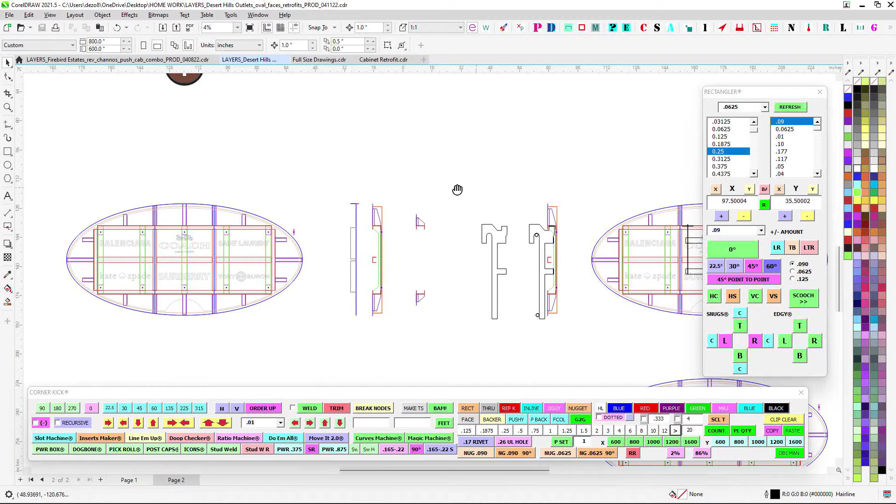All right, so here's how I see it for these oval retrofits. I was sent over the files for the smaller ones, but like I said, we don't have anything for the big ones yet. This is getting it from 60 to 70% to closer to 90, 95, maybe a direction. I'm going to send it to you, and then you'll see what's up, and then we can tweak it if you see something's wrong.

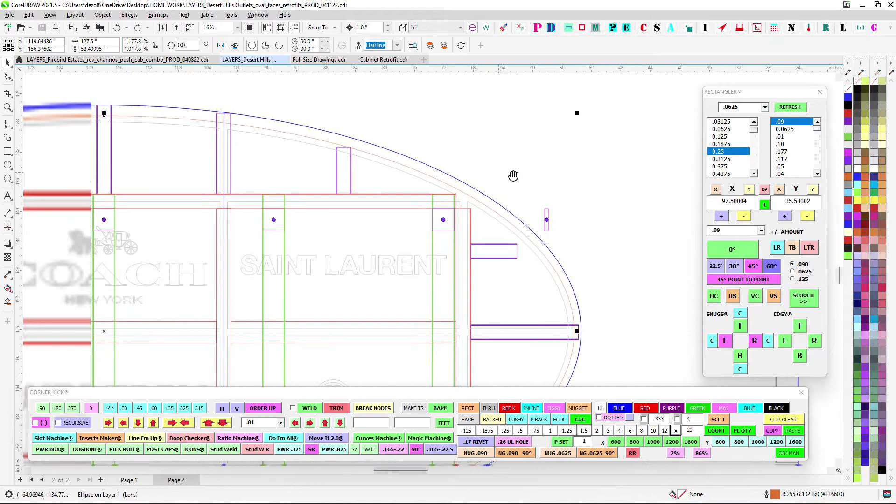So anyway, I got orange here. This is the 5-inch existing cabinet, that'll be the orange ring here, right there. Blue is our outside, not really including any band or anything. This isn't really super accurate, it's just getting it dialed in from 60 to 90.

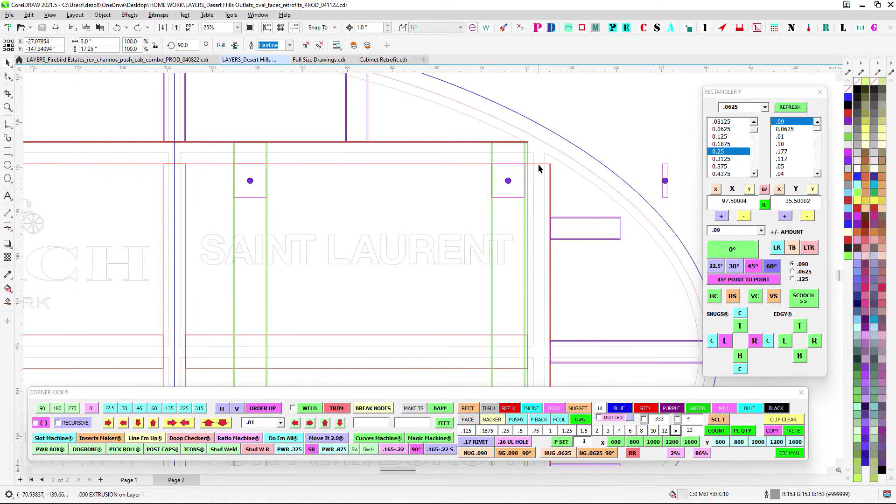So I have our panels, Art sent them over at 3 inches deep. We do have a 1 inch apart. I know we talked about 1.5 inch, but maybe things had to get a little closer. That's going to make it a little tougher to get our fasteners, but if install can work with it, I can do the little tracks with the hidden fasteners, the tool-free fasteners basically. But I don't know about relying on just a shoebox without getting a screw in here to make sure they don't go anywhere. So we'll have to think about that.

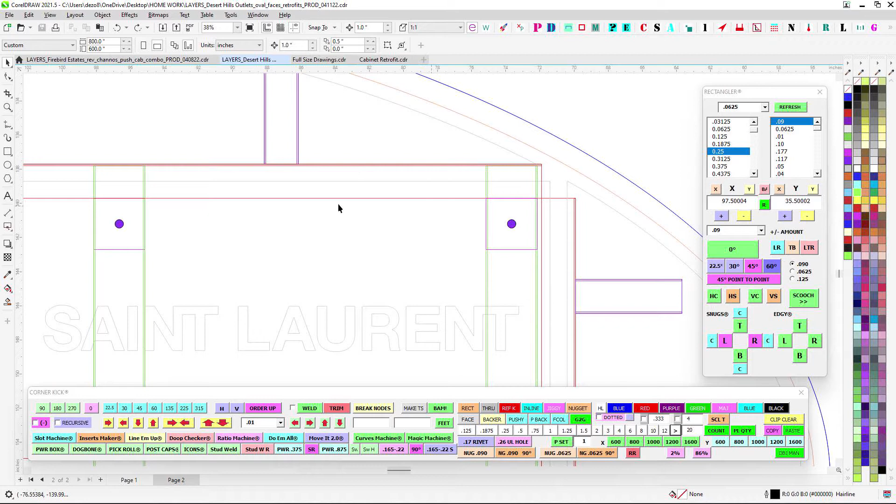But essentially this is just visualizing the box I was talking about. So you see the red here, this is basically a C channel. I've got it at 4.5 deep, and it'll have a 2-inch face, 2-inch face, and that just wraps around the 4 sides here. That makes our nice strong box.

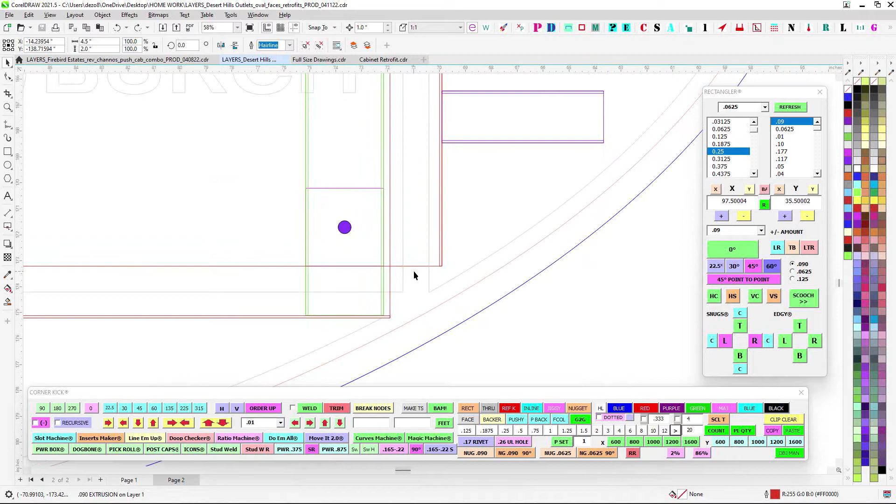I have the corners clipped, I'll do a clipped jig system here. It gives us a 45 notch, that gives us clearance to our 5-inch existing there, so it'll fit inside, no problem. Shouldn't anyway, but like I said, I'm just dialing in.

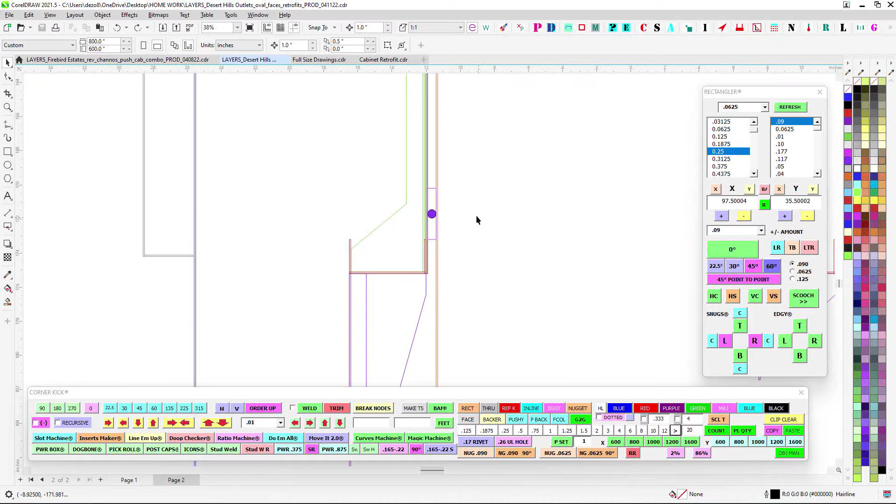And then we'll have our green here as our vertical runners, like we do pretty much every sign that we do that goes on the wall. Cabazon already has that whole system, so it's not any different, so you might recognize that. That's a side profile in green, so that'll go all the way to the wall, and then that is where the mounting points work there.

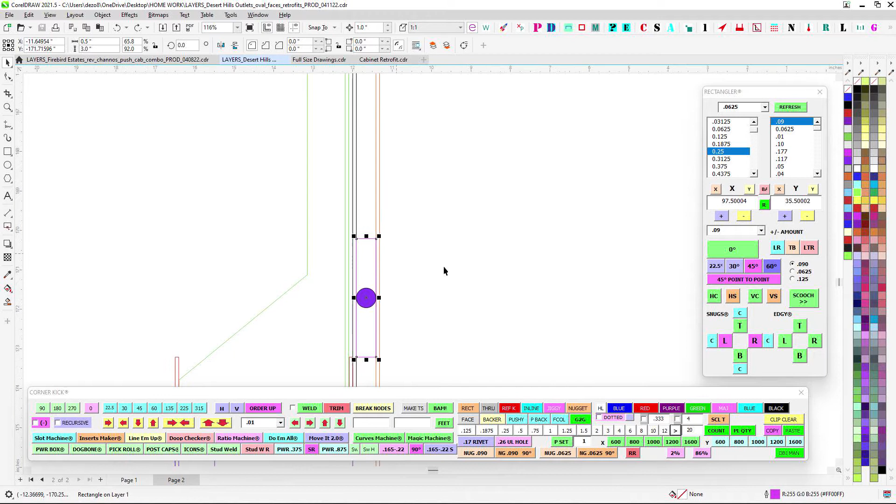I have 3x3 blocks of 1/2 inch right now, just to fur out over whatever the existing thing is here, like we talked about. These could be routed out of anything that we need to make it thicker, or we could stack 3/4 inchers and make it 3/4 of an inch if we need to, whatever we need to do to make this sort of fur out. And then also I can adjust this, this is 4.5 now, but if we need to extend this out without making it pooch out too far, then I can trim a 1/4 inch off, or make this 4 inches deep, whatever.

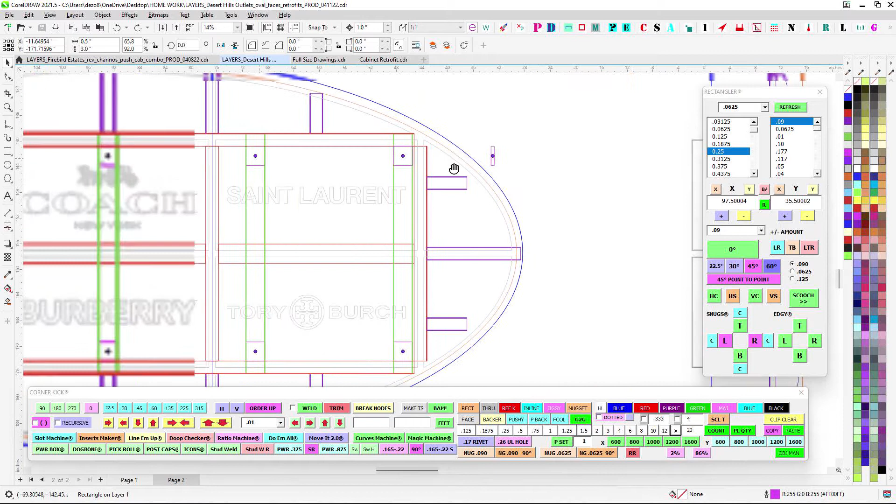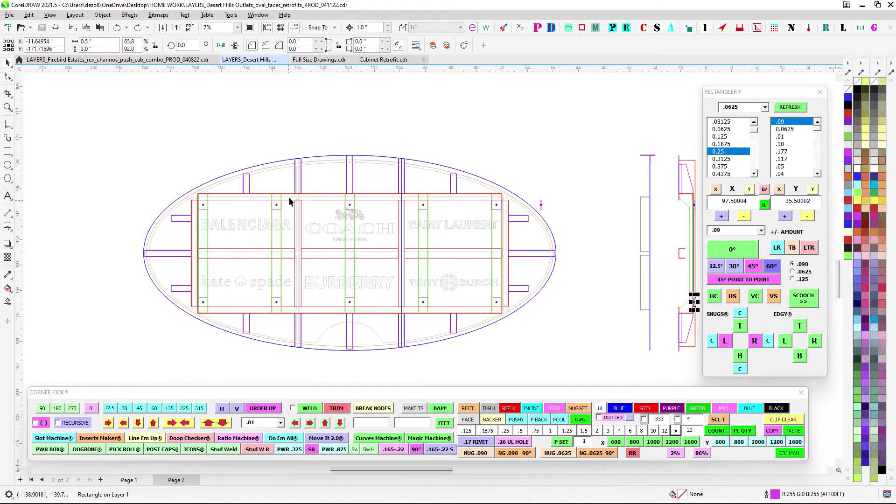So that's the overall outer frame box. And then these will also be bent as a C channel that goes all the way to the back, so the back and the front will be a solid box here with vertical runners that go to the back. And then the back, so we're just breaking it up into these boxes here as one piece. The back will be one piece, and then these will be crossbars here, those will just be C channels like that.

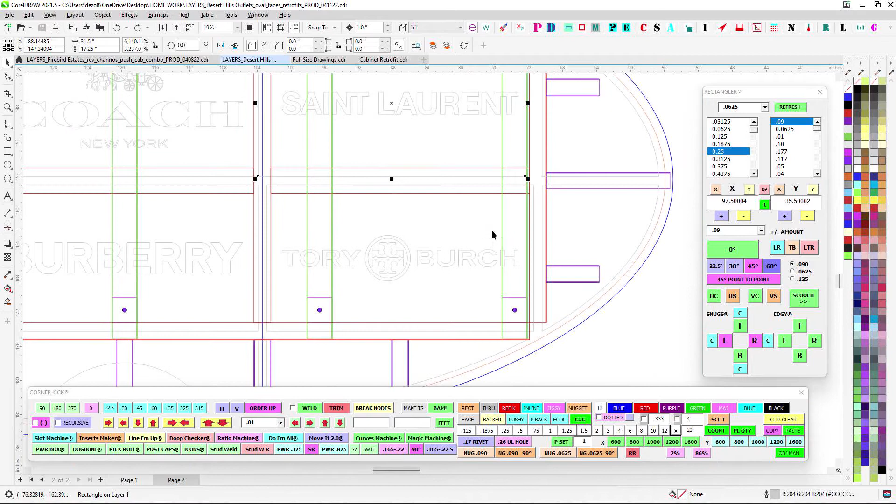And then I don't really have it shown, but we talked about, there'll be an internal framing thing, you understood that, I didn't take the time to make that yet. So each of these will slide onto that track, there'll be a little track ring around each of these openings. The light gray is the face, I went ahead and just made it light gray so it's kind of out of our way. And then, of course, you have the panels up here, these removable panels here.

So, okay, that's kind of the main box, working out from there. So really, that's what we already have on location there, like a backer box kind of thing with these struts, and that's how it's bolted on. These are coming in at 23 apart, which is just right.

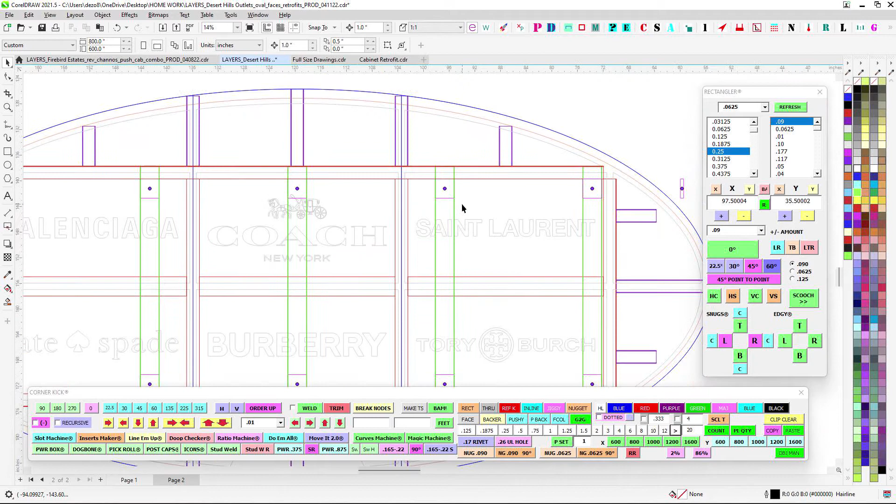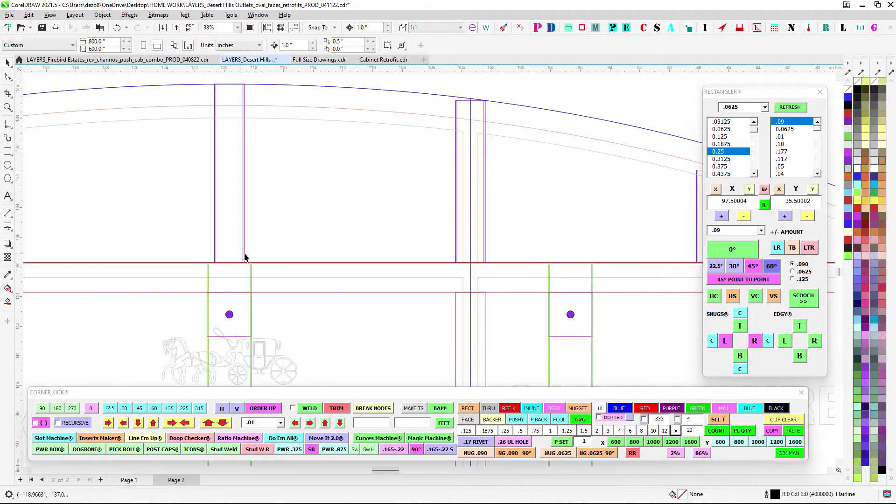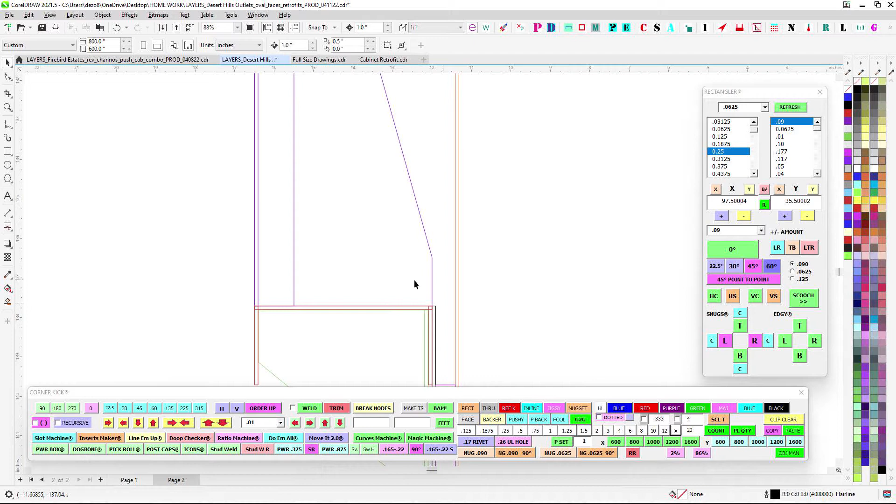It misses, this is the existing frame box here, so you've got plenty of room to play. And then we just kind of run it back here, and this will allow fab to just square this up and tack it to the outside of the box.

So these will be like fin struts that come out arbitrarily from these points, and these will support the face where the panels go. Right here, I'll cut a hole out for this panel to allow access if we need it.

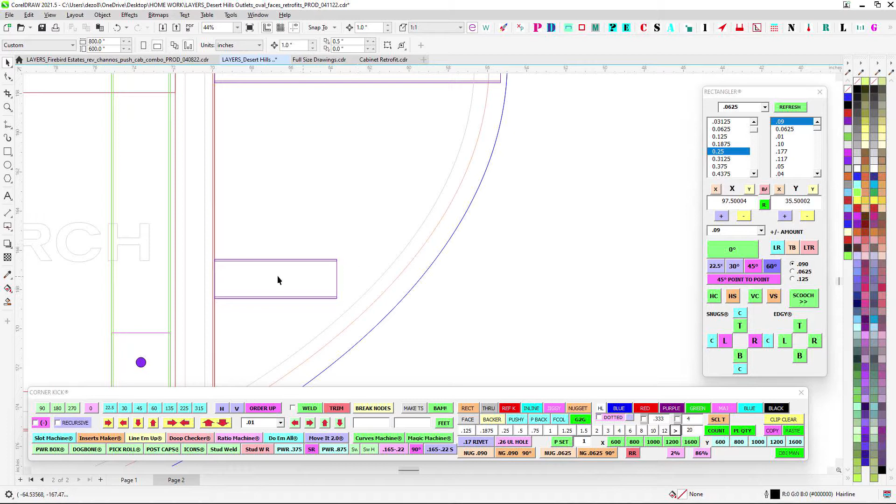But then the face will come around and we could lords this to that face, and that stabilizes it all the way around. And the face will be sitting on this, so that's stabilized. Once we get out here, here's one right here, and that'll be an opening for access should we need it.

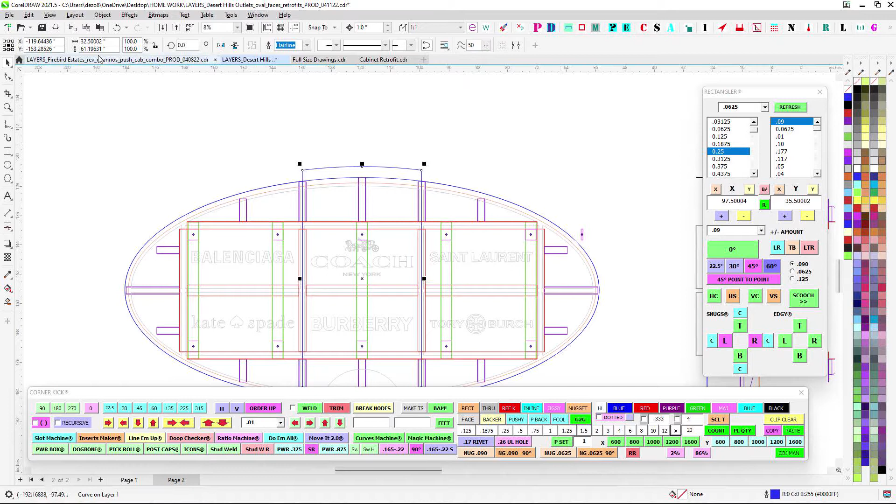So the face will also be stabilized like we talked about. We'll have a face strip here - this is 32 by 61 - and that's what we talked about stabilizing.

So this bar here, you'll have 1 inch on one side, 1 inch on the other. That's basically what we do with all of our monuments. Same thing here, the face will be stabilized there.

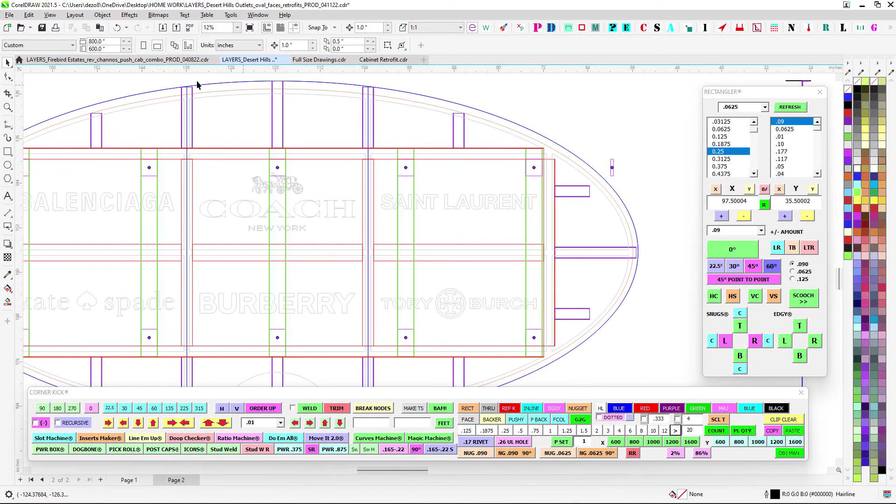And then this seam will run down in between the boxes. You see the light gray, it'll run right down there. So this face seam will be stabilized nice and strong all the way there.

And then this will be like one solid piece, all solid here. I'll cut out what we need here for access inside to get to this thing, whatever it is.

And then that means that this ring - break those apart, there you go - so now this ring will be here.

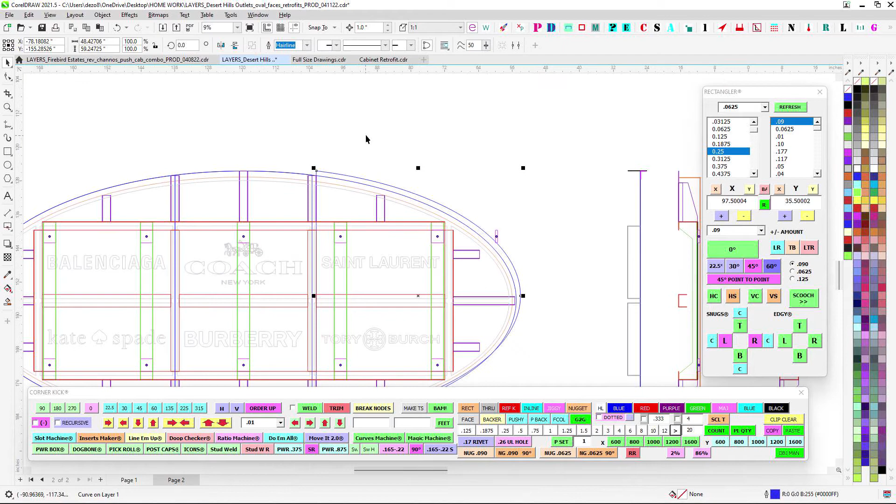You can see that's 48 by 60, so that easily fits on our router. We're good to go there. And then again, we'll be cutting out all the pieces there.

So we have that. As far as the band around the outside, the fact that we're lordsing all this together is awesome and makes it super strong. But then there's no free lunch - so when we go to put the strap on around the outside, yeah, I said it.

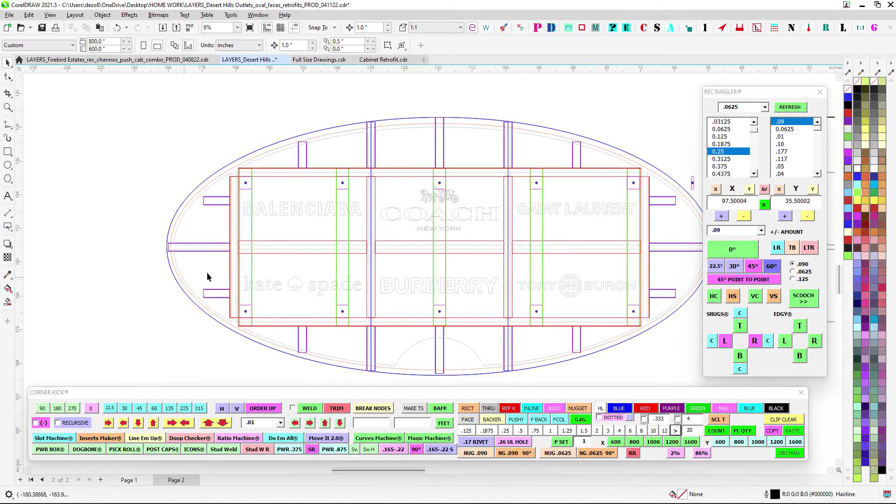When we go to put that strap and fasten it, what I'm thinking is, kind of like what you were saying, stylistically we would have been using screws originally to hold this thing up. So we would have been living with screws every 12 inches, 18 inches, just to make sure it's on there.

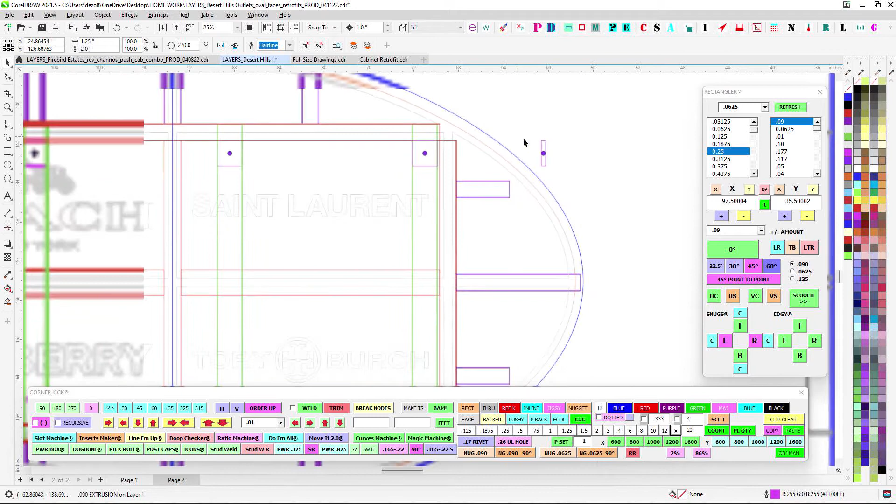So what I'm thinking is we do like a 2-inch deep clip that's 1.5 inches or so down, which is in magenta here. And then we'll go ahead and screw the strap decoratively, but the screws will look like what we would have done to hold it on there.

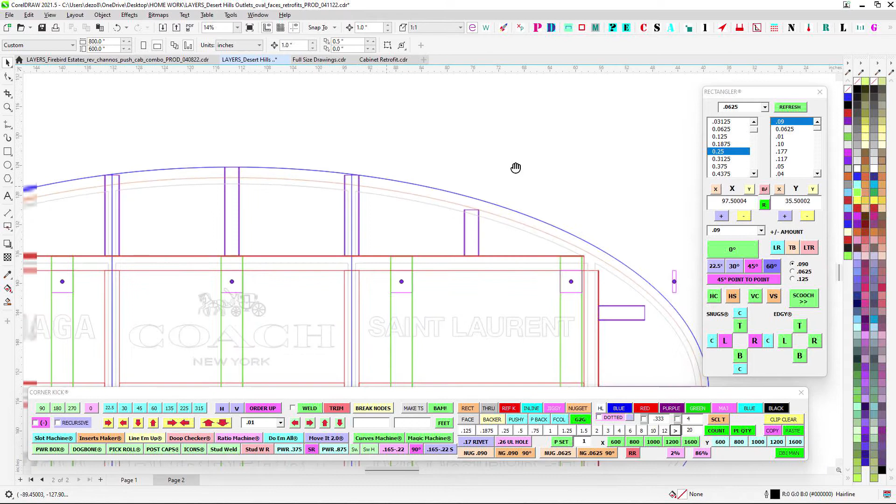What I'm saying though is we're not going to be able to weld this strap on - we're not going to be able to weld the strap all the way around after we've lordsed all this on, because then it's going to shrink and cause the lords to pop, or it's going to live under a huge amount of strain. At some point it will give.

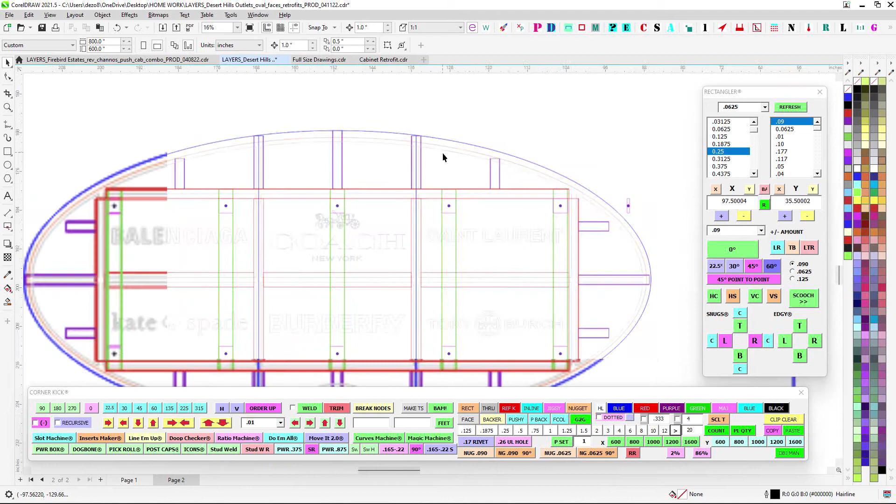So if you're going to go all lords, you can't mix in the welding unless you weld first and then do lords. But we can't do that because this is all in different pieces, and we're going to be putting that strip all the way around.

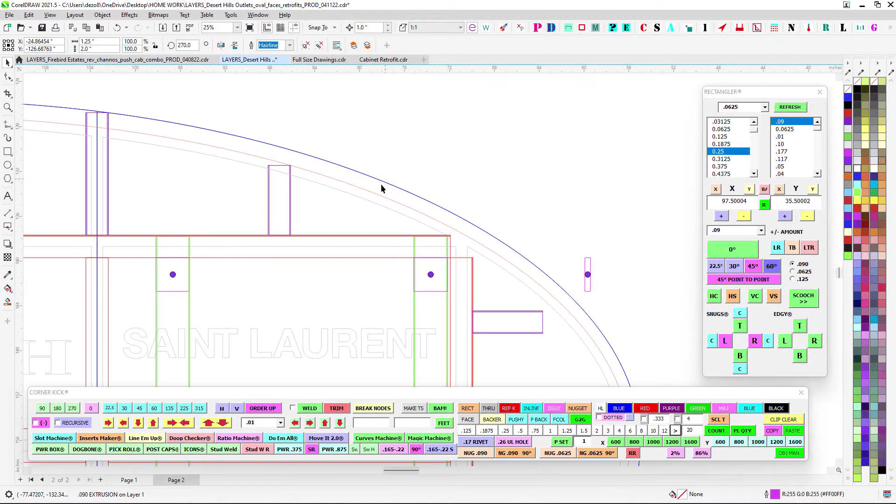So what I'm thinking is we go ahead and just tack on clips where we would have put screws anyway, and it kind of looks like the screw is doing that work. But then what we do is, because I'll be putting the clecos, I can line that screw hole right up and we can use it to align and be strong.

So we'll have a self-tapper that wraps on the strap, and then from the backside we can blob lords on there really good. We can just do a continuous bead all the way around with lords on the backside, and that's really going to make that strong. So you'll have screws and you'll have lords.

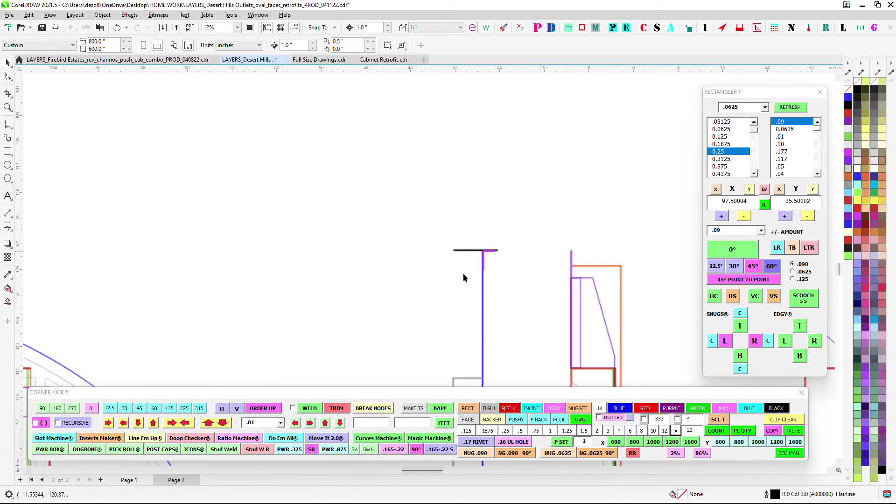And then if we're feeling ambitious, we could even lords the front side, and do like a bathtub caulk job where we make it look nice. That will also put a bead of lords around there if we choose to do that. I don't think we'll need it.

Sometimes there's an issue with paint as well with lords. But if we do it on the backside, that'll seal it up against any light leaks, and it should also make it really strong.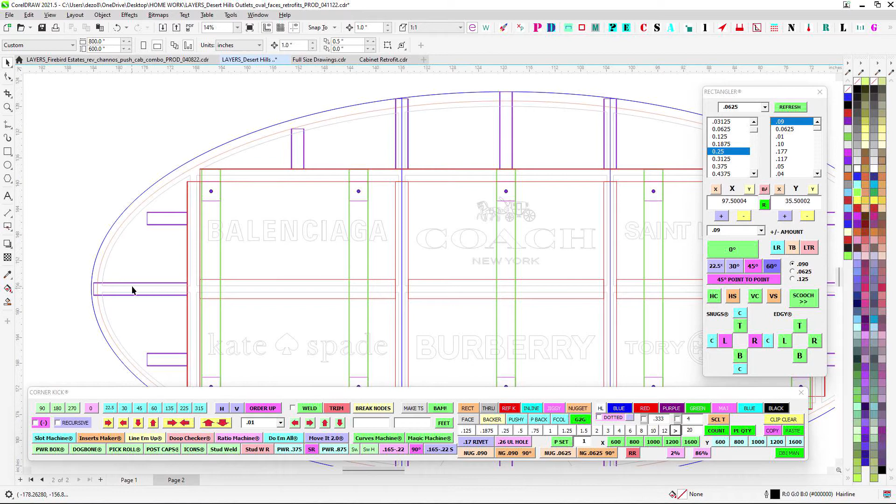It should theoretically be stronger than tacking it. The problem with tacking is that you'll do a tack here, then go over 1 to 1.5 inches and tack again. Not only does it warp the metal and it's horrible, but these tacks will eventually crack because they shrink.

So the idea is that a tack is just a tack. It's not meant to be welded. A tack is not a weld. Not to sound like a Dr. Seuss book or something, but a tack is not a weld.

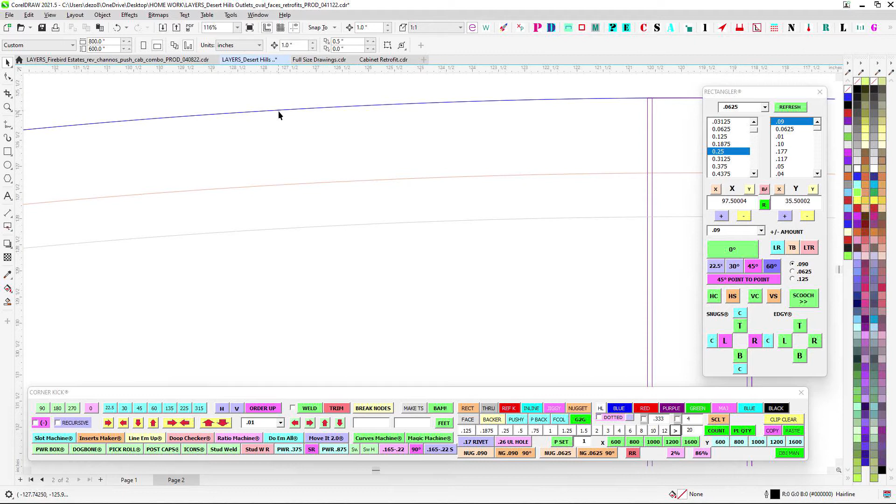So a tack will eventually crack and break. The idea is you tack it, but then you run a bead, and the bead will crack at the very beginning, but generally it stops. If all you do is rely on tacks, eventually they'll break, and then this one is stressed, that one breaks, and you get what I call the zipper effect. You pop one, and then all of a sudden they just start to pop, and there goes your sign.

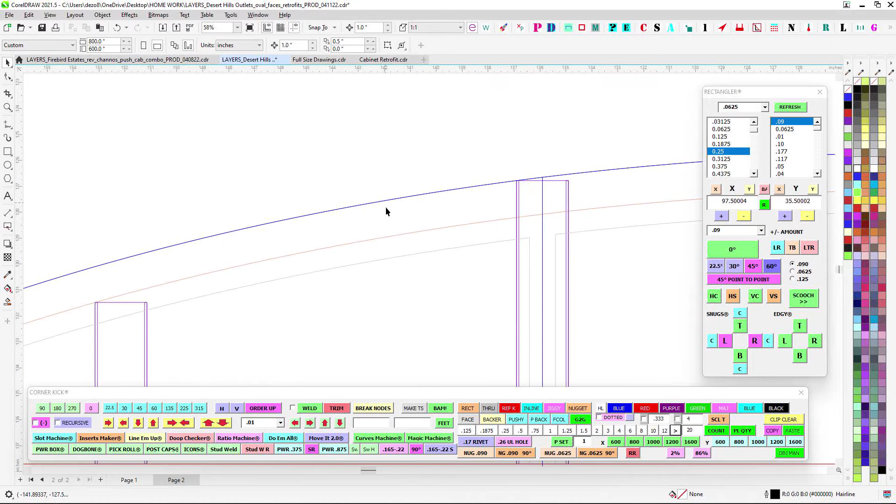So doing screws every so often and actually having them tacked would probably be stronger. If we do a nice continuous bead all the way around, this strip should be on there nice and solid, especially after we've stabilized these seams really well. Then we can stagger the strip across that, and it should actually be stronger than tacking it all the way around.

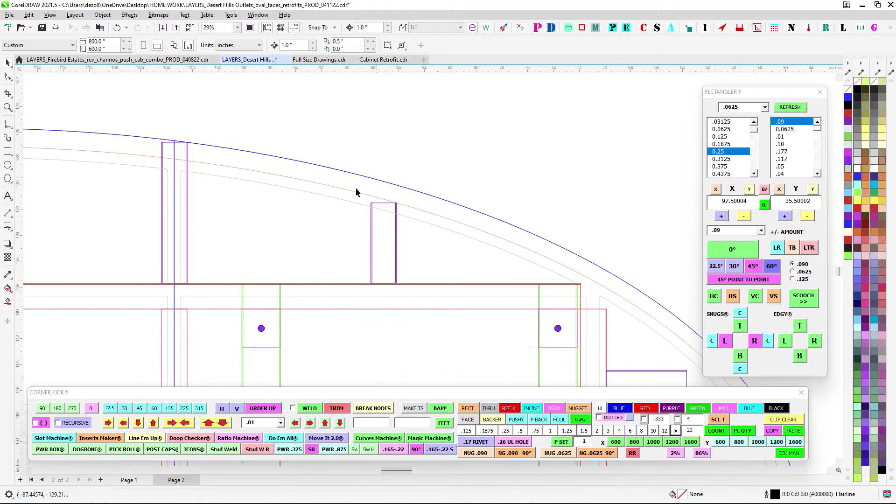So that's the strip, that'll take care of that, that's how we build that. And then, so lifting was another thing.

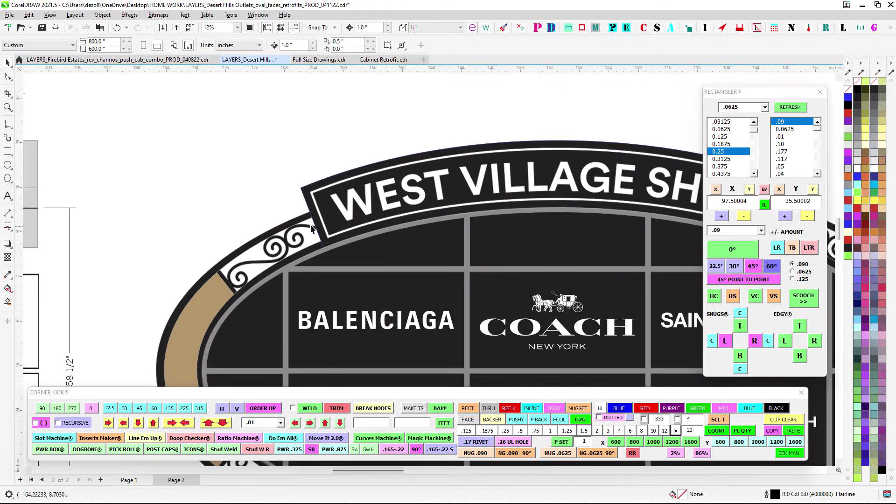I know that this box will actually give us something that helps us, because I think we'll break up the strip and start it there. This box will be attached later, and it's no big deal. You take these panels off, you'll have access to shoot screws, or I'll do riv nuts or something, and we can bolt this on after. So that opens up the top of this cabinet to sort of a lift point.

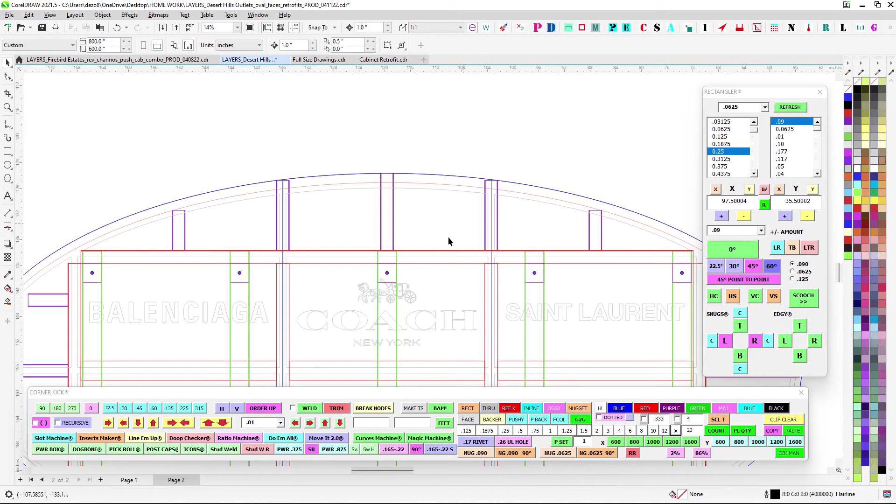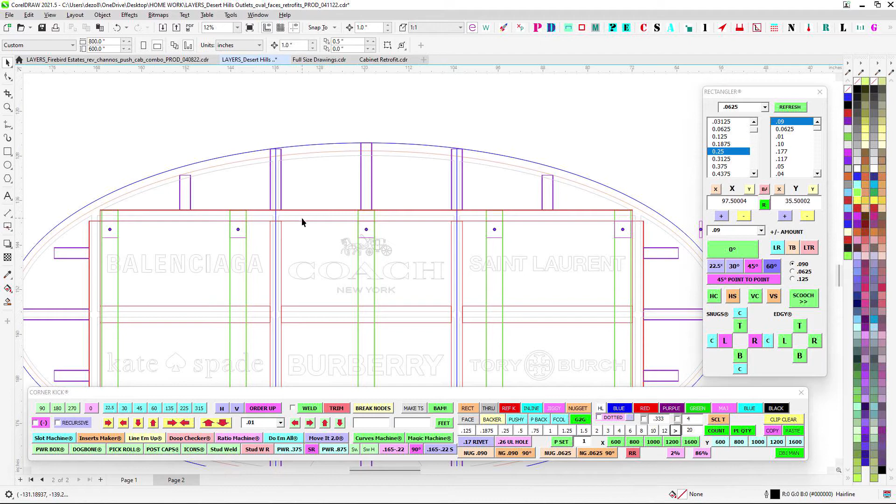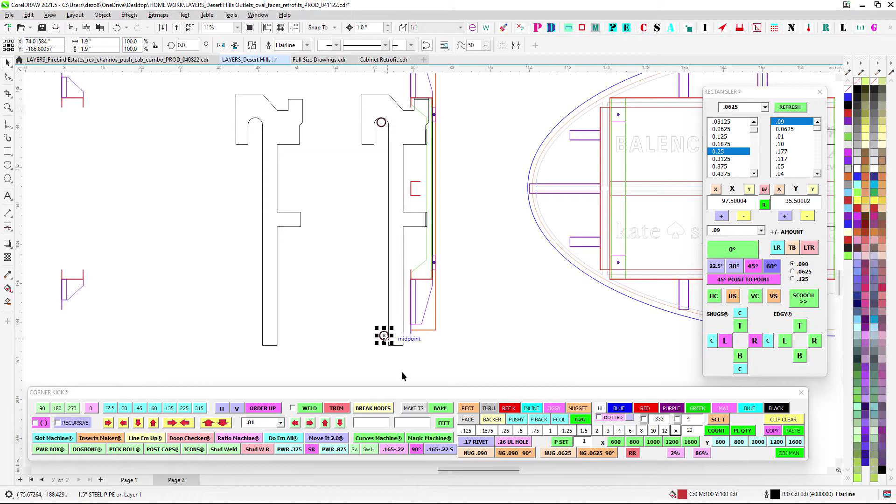So burning a little bit of 1/4 inch, I came up with this idea. Here's the top rail of your basket, let's just say arbitrarily this is 44 inches. I don't know how tall a basket is, maybe it could be longer or shorter. So this will be a piece of 1/4 inch that will kick and lean against the bottom, hook onto the top of the basket, and then go up inside.

You can see here where we'll just have a 3-inch piece, 3x6, 3x6, these are the verticals here. And then we'll just have a crossbar that will rest up against the green on the inside. So this will kind of hook on there, bonk.

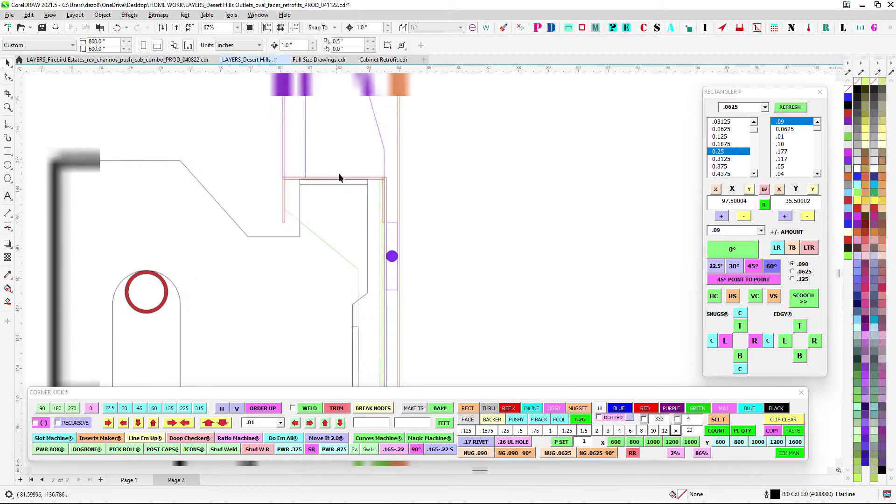I'm thinking it would be nice to do some welded 1/2-inch nuts, so you can come in through here, because this will be open right here. So you'll have access, you can come in, bolt it for safety, and then this thing is just hooked onto the basket. But that means getting a boom that has enough capacity to lift everybody up there and lift this thing. So we'll get to weights in a second.

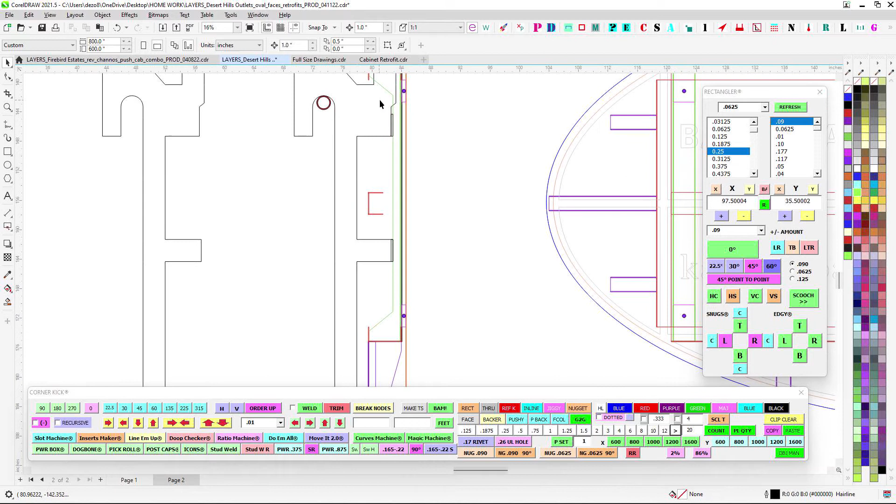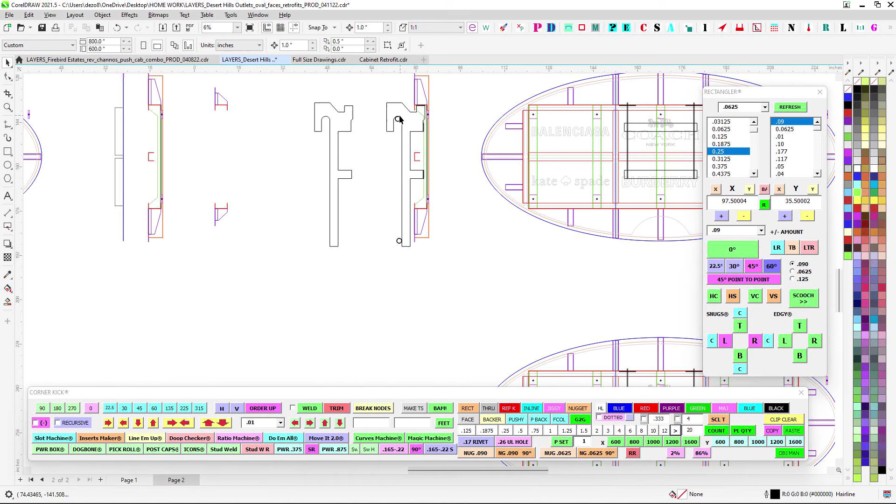So this thing will bonk against here, and then lean up against this foot, and it'll be clear all the way down here. So you can lift the basket up, and then you can even get to here. I made sure not to block that, but you can bolt this thing in place, and then it's a matter of unbolting, clearancing it, and bringing it back out. Or you could leave it bolted, clear your basket, get out of the way, come back in, undo it, and then just lift it. Anyway, so it'll clear.

This is your middle brace here. You can see right there, that's this brace. So that'll clear that.

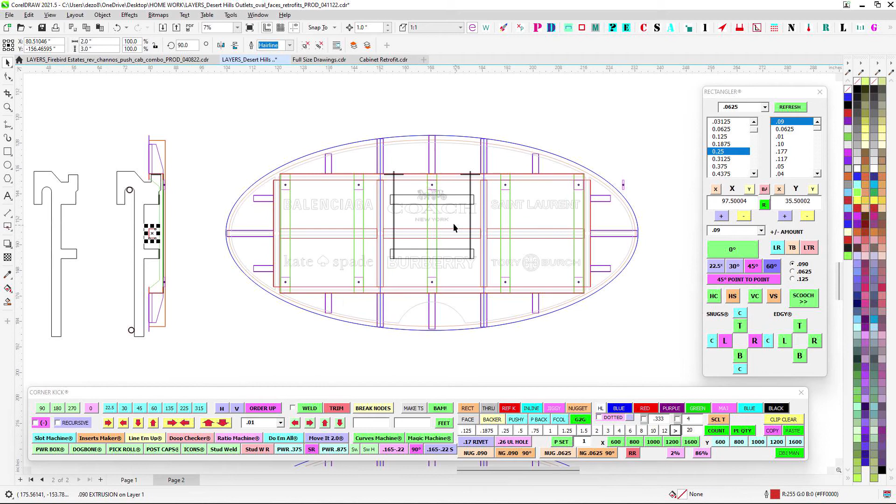It's just going to be against that one piece, a little wobbly, but I think that would be a way to do a hanging system that's safe and get it up there. So this is what I'm saying. I'm sending this to you. We can go back and forth, maybe you have an idea on install. Jonathan wants to take a look at this.

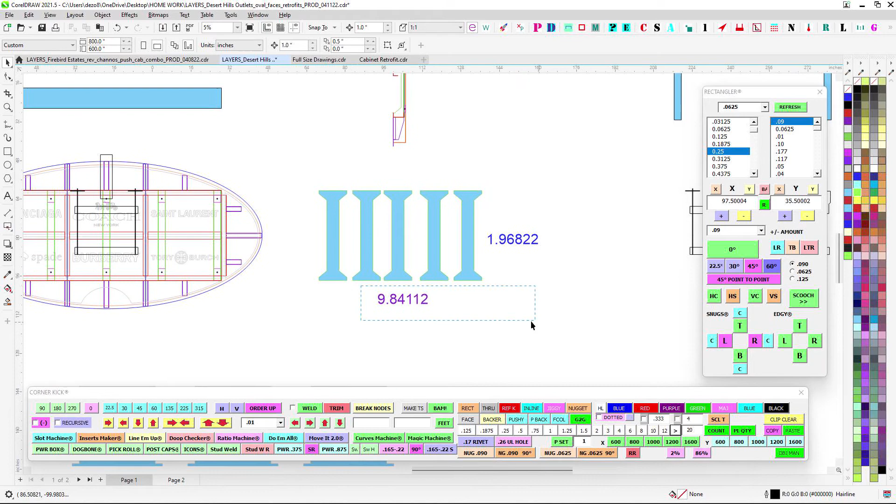And then for weights, I did super down and dirty. So you've got your back bracing in green here, those are only 9, 10 pounds for all of them. It's the panels that are actually pretty heavy. Each panel, and I know there's push through and stuff, and I only did so much - each panel is roughly 7 pounds. So you got 43 pounds just in aluminum, and you've got another 43 pounds.

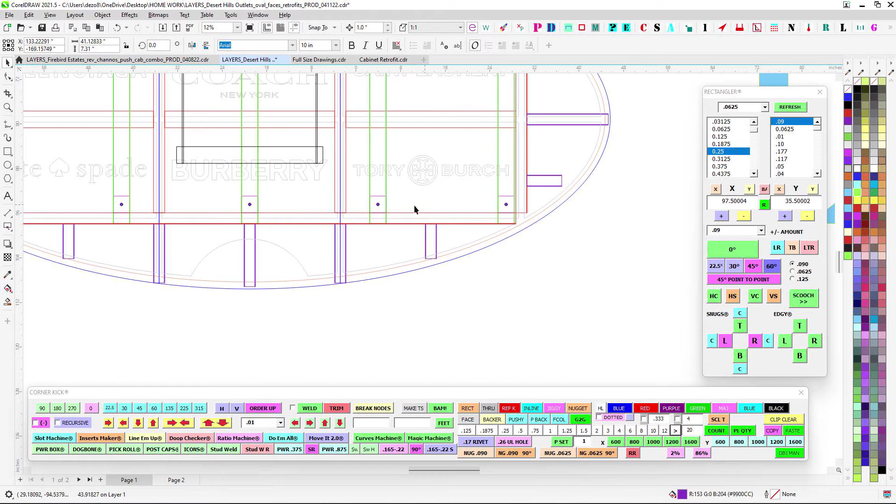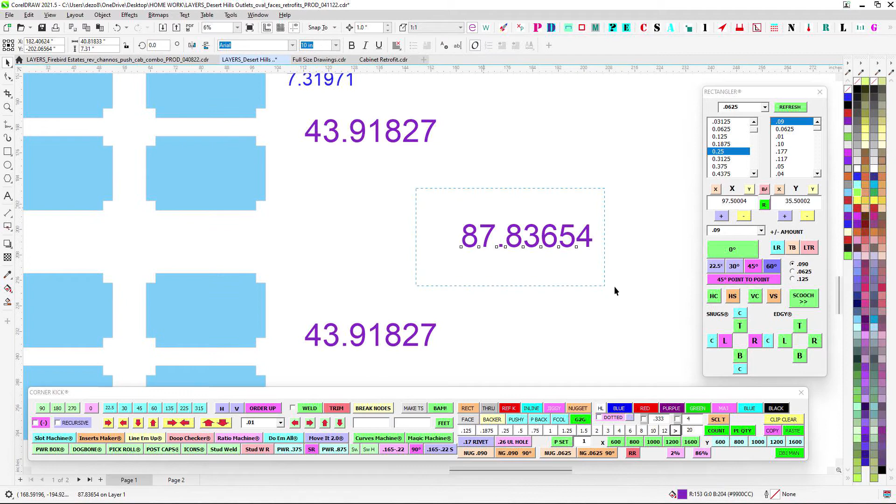What I did is I just said this gray here is one panel. So I took this panel, sliced it in half, so one of these panels is this panel and this panel. And then this panel and that panel put together is one, if you slice this in half roughly, so that's another panel. These would be the face panels with words, and these would be all of our back face panels, give or take. So you add these together, you've got 87 pounds worth of aluminum just in your faces there.

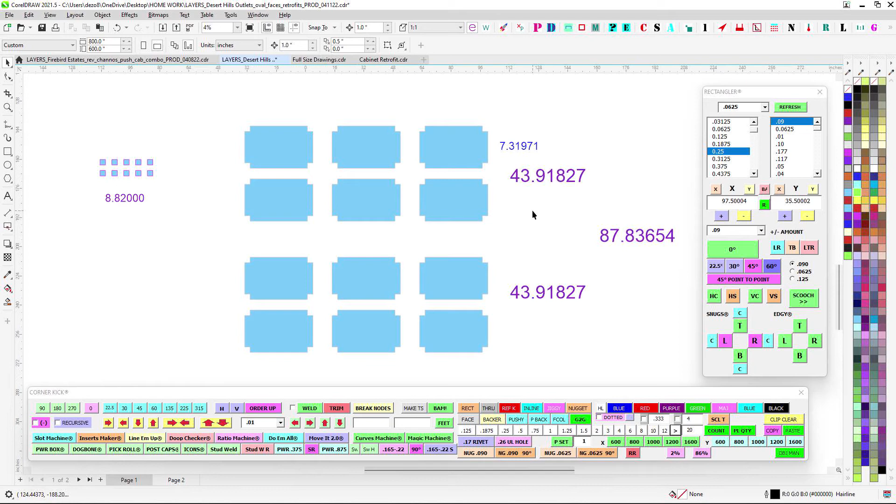And that's not including the push throughs. So the push throughs would add maybe another 5 pounds. I remember with the Loma Linda one, I did the measurements for all of the push throughs on that giant monument that's out in the shop right now, and that's only 30 pounds for all the push throughs of that. So the push throughs won't add up to a whole lot more.

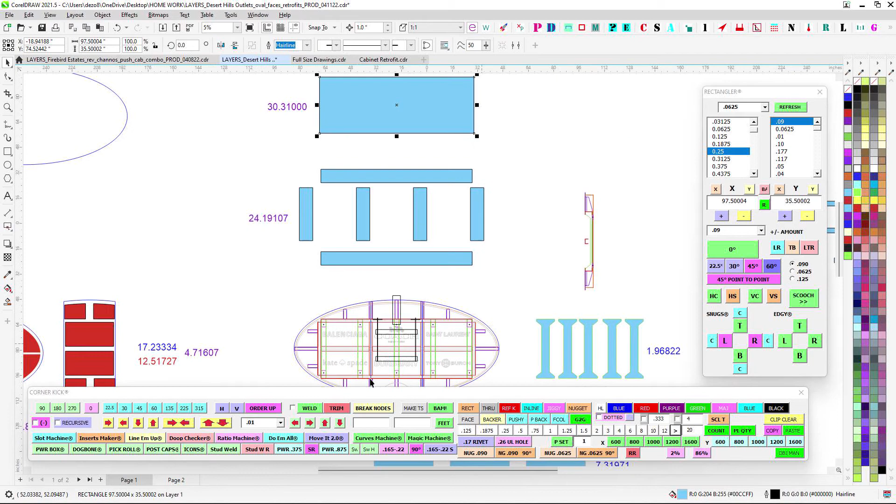Anyway, the faces are nothing because you've got voids. So it's 17 pounds worth of aluminum, but we take out 12 pounds worth of hollow, so this face is only 4, 5 pounds. So you got 14 pounds worth of face aluminum. The backer is 30 pounds for the whole backer sheet to seal it up. Okay, you've got 24 pounds worth of that.

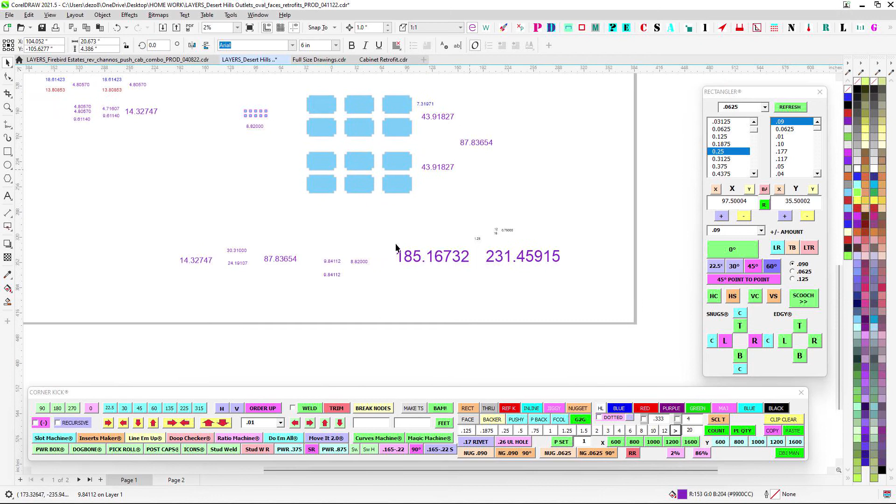And I didn't really do these guys here because, whatever, but if you take these and rough in that, there's another 10 pounds, so I kind of took that into account. The strip is 12 pounds worth of 090 all the way around, but I know it'll actually be notched, so it might not be the full strip because we have the arrow and we have that box. So, whatever - all of this added together, you got 185 pounds when it's all said and done, plus the ones that I didn't account for, a few things here and there are the push throughs. So if you say 200 pounds on the smaller ones, we're getting there.

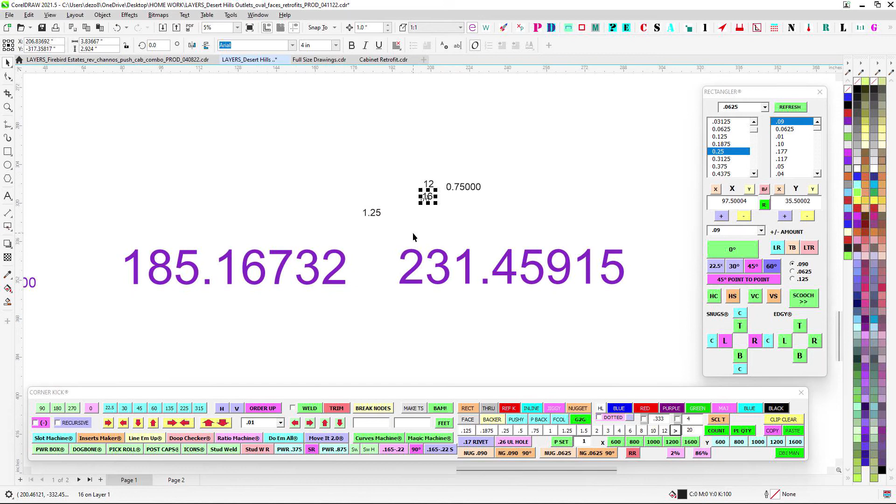And then if you take 12 feet, and I know these aren't 12 feet, and then you take 16 feet, that's 25% more, so I just multiplied this out. And so the bigger one, just pure math, is 230. So if you round that one up to, let's say, even 275, 300, just to be safe.

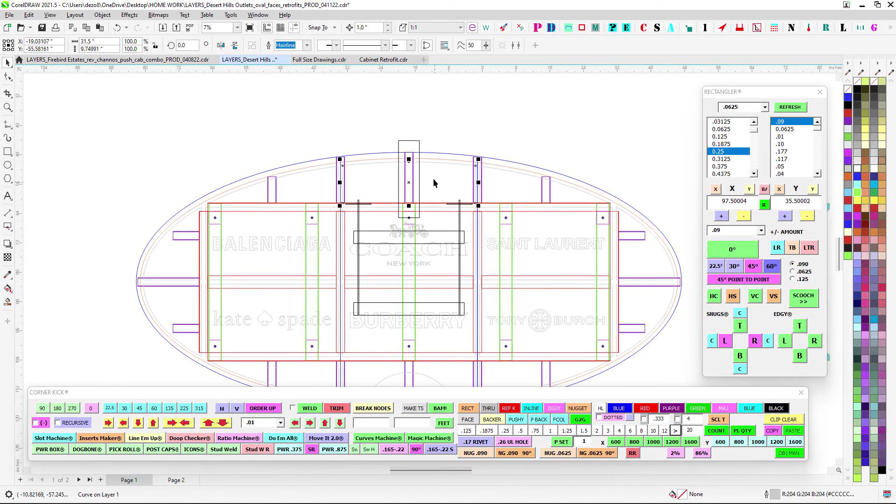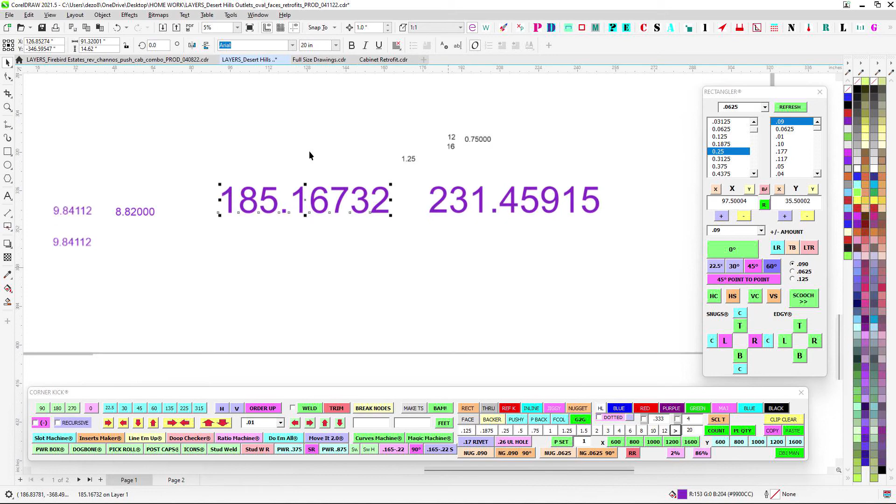But you're backing out. So what I'd like to see done, just to save the weight, plus it'll be access for you guys to do anything you need to, is to ship separately all the panels off of these. That's going to save you this much plus push throughs. So 185 pounds, but 100 pounds of that might actually be push throughs and faces. So this frame actually is not that bad, it's going to be close to 100, 120 pounds without all the faces attached.

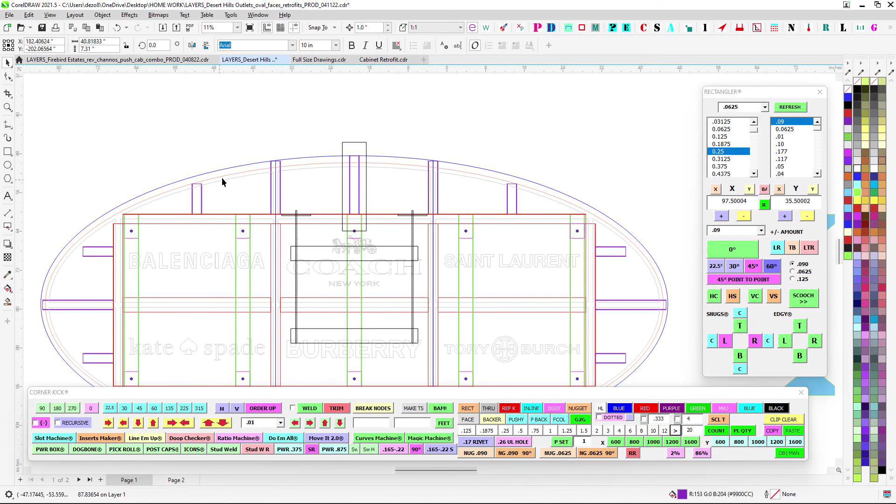So take those faces off, and I know it's kind of a pain in the butt sometimes, but stack them up nice and then just worry about using, work with the skeletons, get everything. Because to attach this box, you're going to have to take these off anyway, these panels. So I'm thinking, if install's listening, get these all painted, but make a provision to ship, make a system to foam together all the panels in one box and just expect to take those separately. That'll make these frames pretty light for you guys, and I think that'll be the way to go.

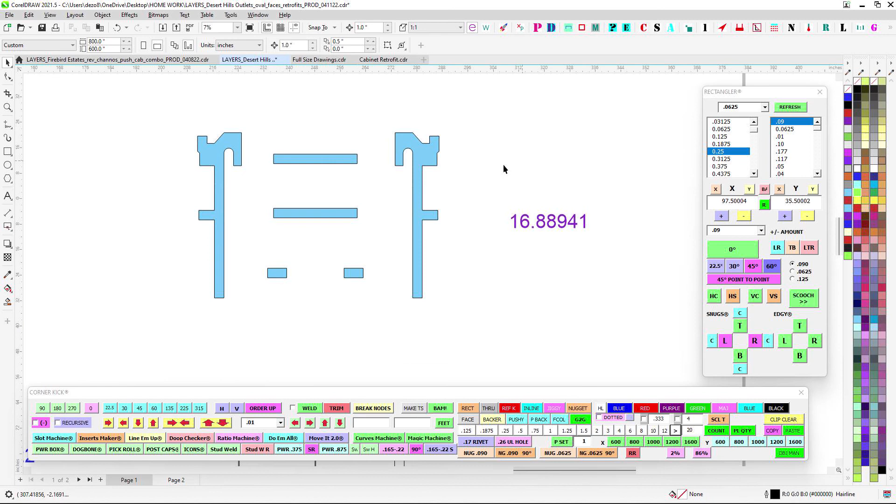And then the lift thing, just for numbers, I did this - it's 16.89 pounds worth at a 1/4 inch if we decide to do something like this. So when you're doing the boom figuring, make sure you get a capacity if you're going to do a scissor lift boom thing. So anyway, I think that should do it.

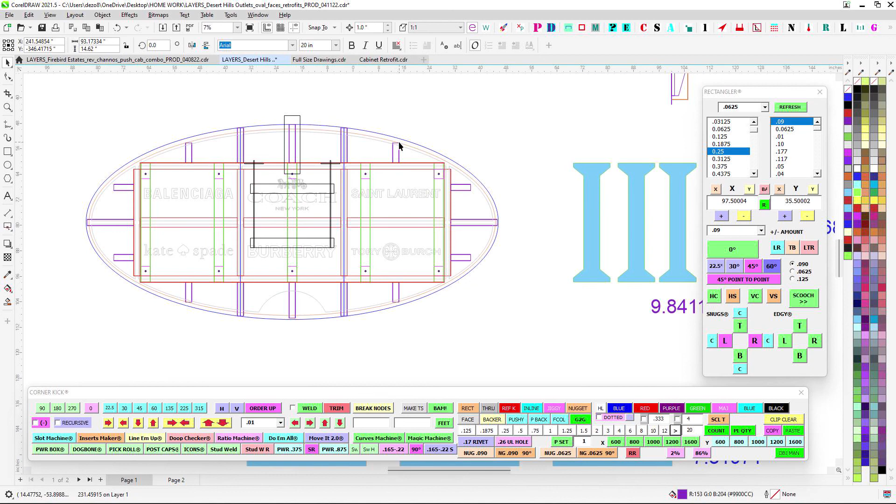Just hit me up. Like I said, back and forth now, I think we got her closer to 90-95%. We'll dial it in once we get some real good measurements, and I'd like to meet with you one final time before I press go to make sure we're all driving in the same direction. So anyway, hit me up if you have any questions.